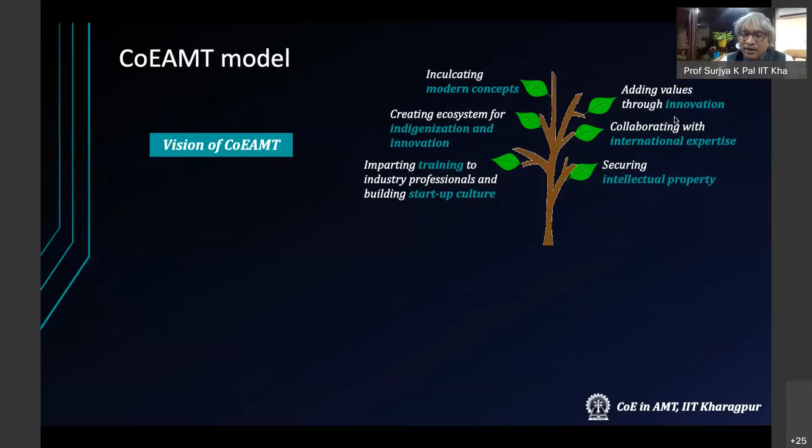The Center of Excellence in Advanced Manufacturing Technology at IIT Kharagpur is an interdisciplinary, industry-focused R&D center. We established this center in early 2018, working closely with industries, both public sector and private sectors. We are following the footprints of Warwick Manufacturing Group in the UK, working on modern concepts to bring innovations in the field of manufacturing.

At the same time, we'd like to create an ecosystem between large industries, small industries, academic institutes, and research units. We are very much open to working with international expertise as well. While executing projects for big industries, we are also giving training to industry professionals in manufacturing. We get problem statements from OEMs, working closely with OEM engineers and researchers to give solutions. We are also nurturing MSMEs so they can learn modern concepts and join the supply chain for big industries.

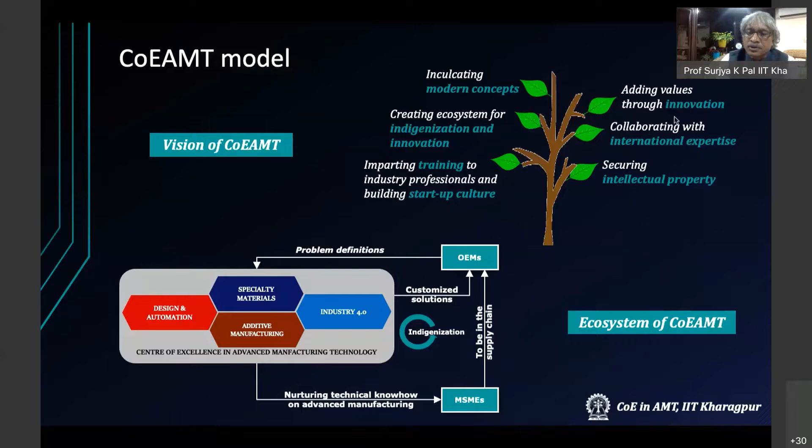While executing projects for big industries, we are filing patents, meaning the intellectual property rights are jointly shared. We have a large number of equipment and state-of-the-art facilities so we can work for industries. Our facilities are at industrial scale, so we can catapult academic innovation into manufacturing industry needs.

These are some examples of our facilities - the hybrid additive manufacturing facility, which can print metal objects close to 1 meter in length. We have scanners, and a CT scan machine is also coming up, which should be able to scan large size objects. We also have machining centers and characterization facilities.

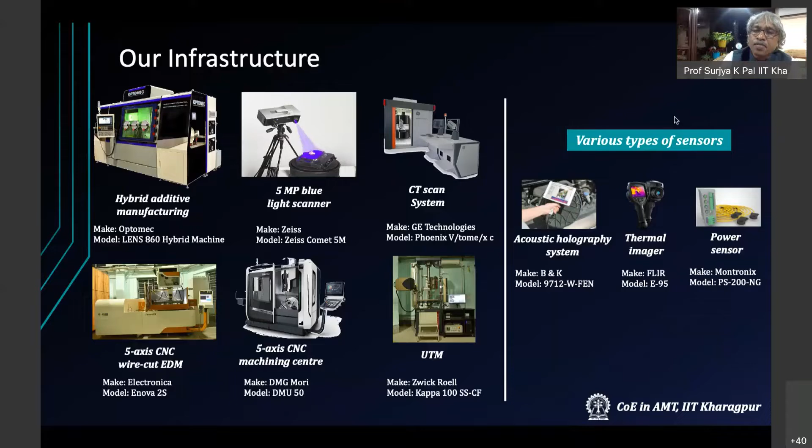We have a large number of robotic welding facilities, all sensor integrated, so we can check product quality and also check the health of the machine. We have MIG welding, TIG welding, spot welding, laser welding, friction stir welding, and also robotic structural vibration facility.

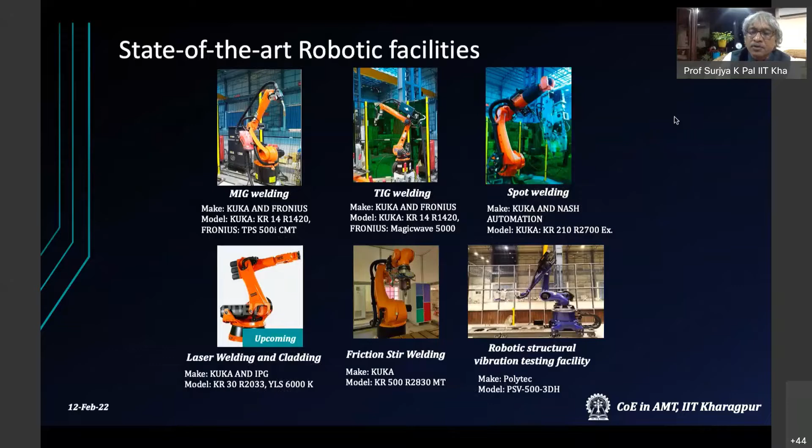All our infrastructure is housed in a 40,000 square feet industrial site area. I'm just showing a small video of that.

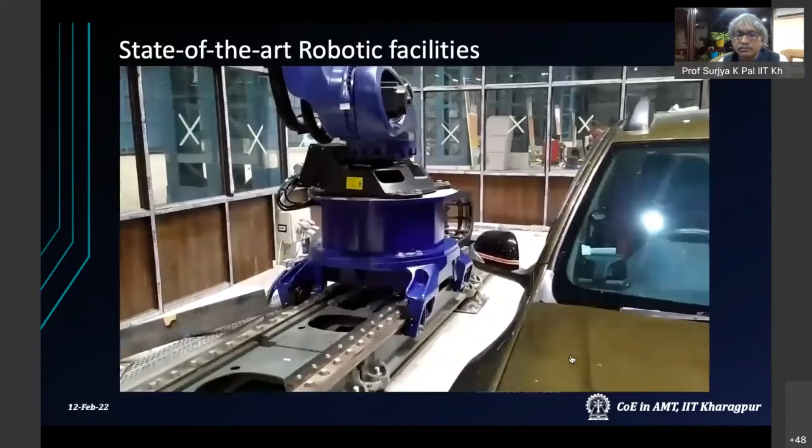We are very much eager to work with industries. On a daily basis, we are interacting with various types of industries so they can come forward and we can also work for them. With this small introduction of the Center of Excellence, I'd like to request my colleague, Professor Anandaroop Bhattacharya, to introduce Professor Christopher Bailey and take the proceedings.

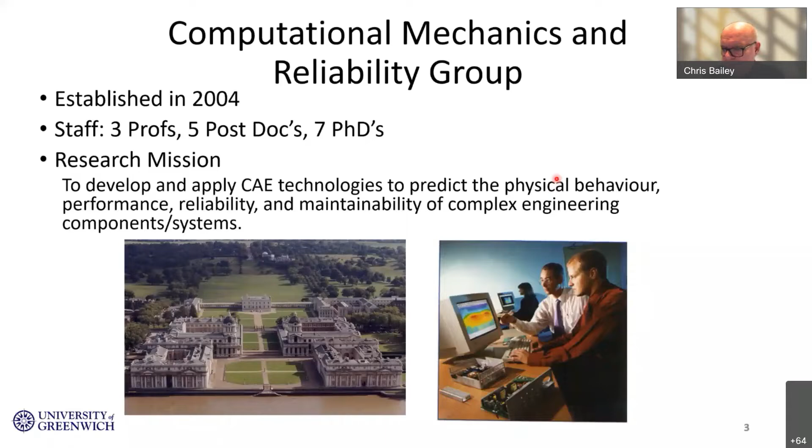So the contents of my talk today, as per the title, is very much around advanced packaging. What do we mean by that? And also the very exciting field of additive manufacturing, and how is that adding value today to electronics packaging? And then I would like to make some conclusions.

You may have heard of Moore's Law last week. Traditionally, since the 1960s, what has driven the electronics industry has been Moore's Law, based on transistor scaling. Moore's Law states that the number of transistors on a piece of silicon would double every 18 months. And that has held true since the 1960s until recently, because Moore's Law was also about the economics of this scaling, and today the actual economics changed nearly 10 years ago, and it started to become much more expensive to continue Moore's Law.

If we think about where Moore's Law has gotten us today, down at 5 nanometer dimensions, the transistor scaling we have achieved has just been incredible, how it's developed and progressed consistently over many years. But today, the sheer cost of continuing Moore's Law and what we call system on chip, where you try to build as much electronic functionality on a single die, the cost of doing this going forward has become too expensive. Hence, packaging and advanced packaging is now seen as the way forward by many companies in the industry, including the likes of TSMC, the world's largest fab facility, as well as Intel.

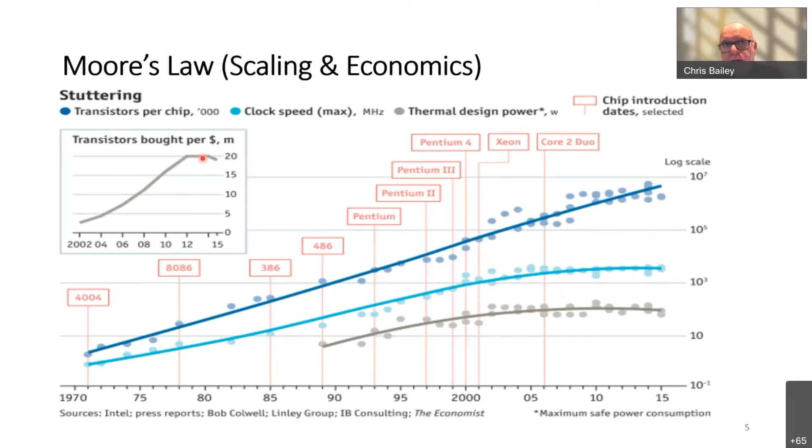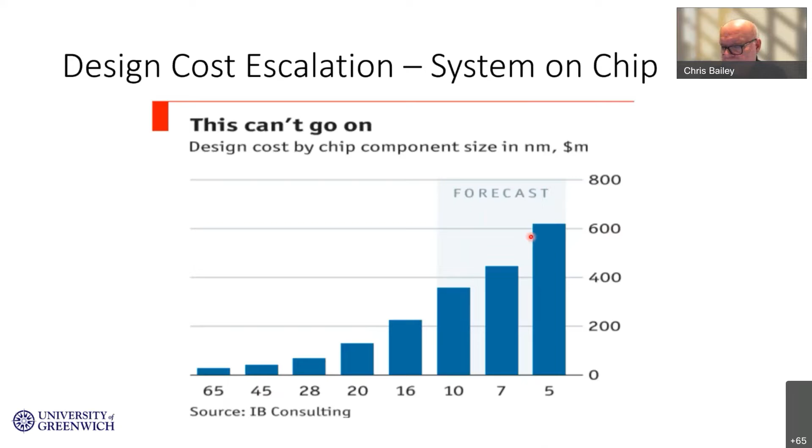Today, we hear a lot about the term chiplets. If we imagine a system on chip with a lot of different functionality, we can now start splitting this functionality, known as disaggregation. So going back to single die, but if you had logic and RF capabilities at different technology scaling, why would you do that all on the same die? You can actually start bringing these together now in a package.

This is known as system in package, as compared to system on chip. So this is the chiplet evolution, and how we package different chiplets from different technology nodes together is the whole concept of system in package, and also heterogeneous integration, where we may wish to pull MEMS components with optical die all in the same package as well as silicon.

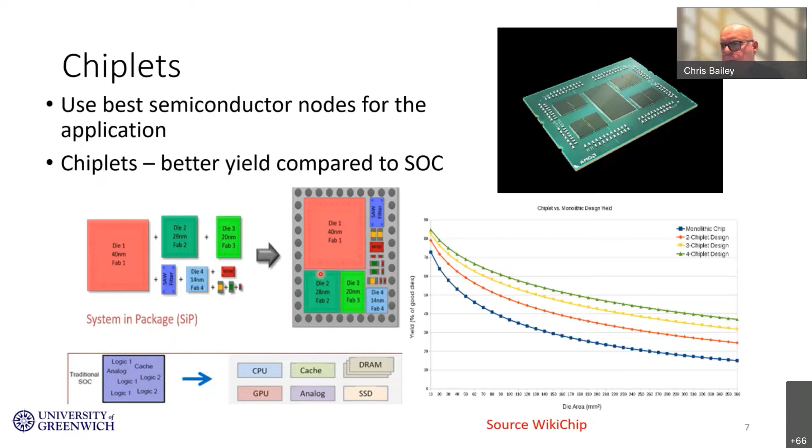So I mentioned that term heterogeneous integration, and as Professor Bhattacharya mentioned in the introduction, this roadmap, the heterogeneous integration roadmap. I will talk a bit more about that shortly, but what do we mean by heterogeneous integration? It is the integration of different technology nodes, 28 nanometers, 7 nanometers, 40 nanometers.

We use the technology that is best for the die that we're producing. And that could be MEMS, silicon photonics, power ICs, logic, RF, etc. It is miniaturized in the package by advanced packaging technologies. It's performance optimized in terms of electrical behavior, signal and power integrity, as well as thermal and mechanical.

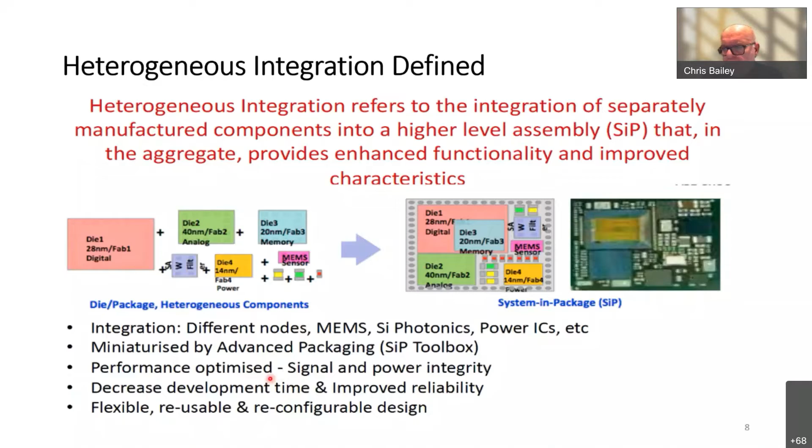So advanced packaging architectures - last week you would have heard about flip chip, BGAs and through-hole technologies. Here we're looking at wafer level packaging, fan in and fan outs. Now this is actually doing the packaging on the wafer before you split the die on the wafer. You would actually package on the wafer, and two common technologies there are fan in and fan out.

Then we have flip chip - you would have heard about that last week - and 3D IC. Now this is actually taking different die and stacking these on top of each other. This is very common today in memory, where we actually stack the die and then we use what's known as through silicon via technology to interconnect the die through each other.

Now all of these would be looking at a substrate or an interposer, where you can have the different die in the same package but connected to each other and the outside world through an interposer.

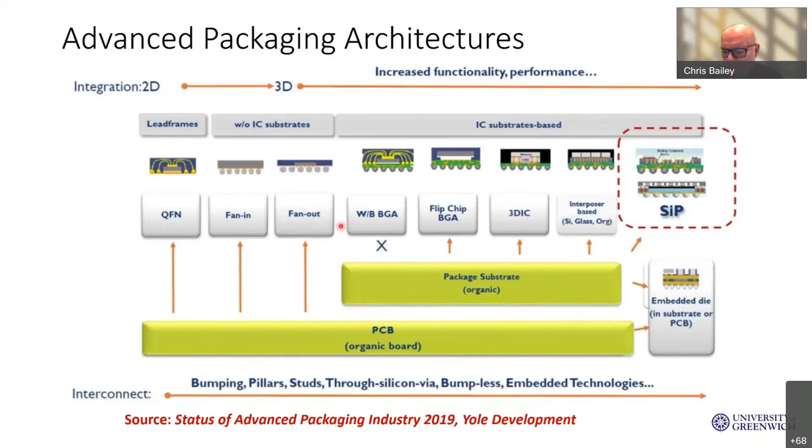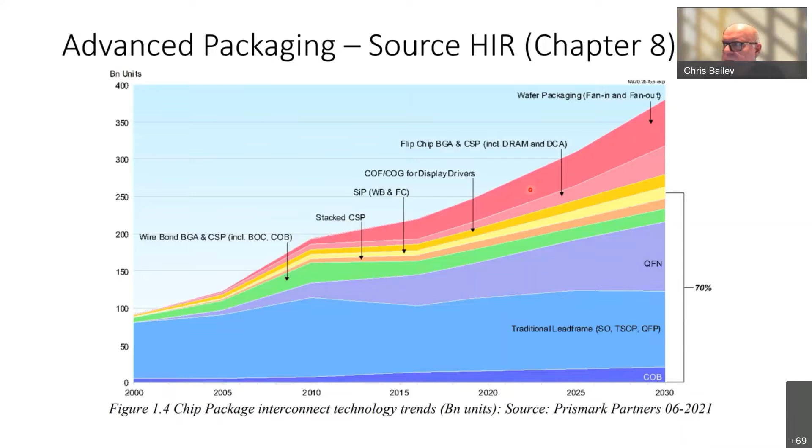If you are interested in learning more about advanced packaging and heterogeneous integration, do go to this link here on the IEEE Electronics Packaging Society webpage. There are 23 chapters in this roadmap, and each of these chapters discusses the current state of the art in different areas of heterogeneous integration and advanced packaging, and also the challenges and potential solutions to those challenges going forward. So it covers a whole number of application areas, as well as technologies and underpinning technologies for advanced packaging, such as modeling and simulation, and also co-design, which I'll talk a little bit more about in a moment.

So coming on to the design, you would have that chart I showed above about the sheer cost of design for packaging, but taking a high level view of design today, essentially we have chip design, and it doesn't integrate that well with package design and then the overall board design, the whole printed circuit board, or the system as we may wish to call that. And generally there'll be different design tools used in each of these.

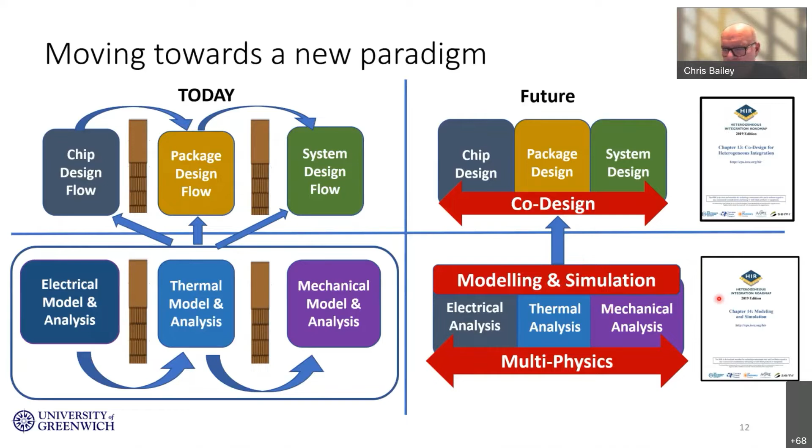The whole area of multi-physics for advanced packaging is really understanding the interactions, the electrothermal interactions, the thermomechanical interactions, particularly chip package interactions, and the influence of the package design on the electrical performance of the chip is becoming quite important. So the tools that are evolving from the tool vendors are starting to address some of these challenges in the area of multi-physics and scale modeling domains.

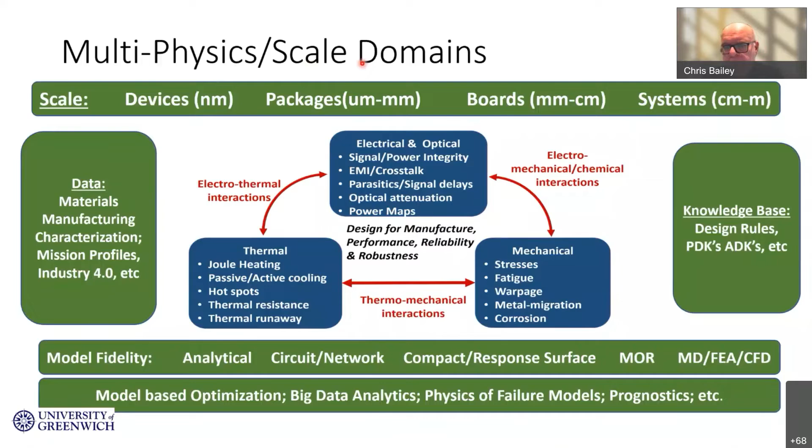Let me now move on to some examples, and this is actually a QFN package. I've picked this example because understanding the package design and behavior is important, but also understanding the influence of the assembly process - what materials are we using on the board when we assemble a package on the board. And this is the area of conformal coatings.

Now, conformal coatings are placed on a printed circuit board with the packages, and it's there to protect against contamination, moisture, and corrosion, and also a mitigation against a phenomena known as tin whiskers. Over the last 15 years, the industry has moved away from tin lead solder and solder finishes towards high tin content. This is under environmental legislation where we've had to remove lead from the solder materials and go towards high tin materials. But that can evolve into this phenomenon known as tin whiskers, which is a failure mechanism that we need to avoid.

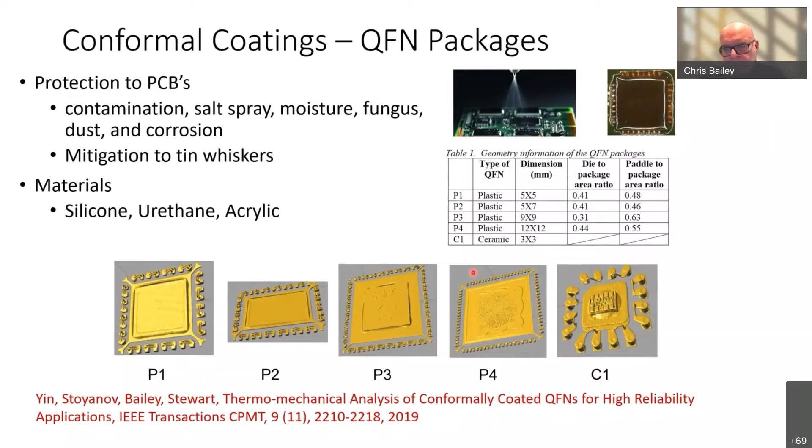And in doing that, the industry would use something called conformal coatings. But when we use conformal coatings, how does it interact with the package? This is a project we did at Greenwich with a number of companies, looking at different package types. And when we're looking at these packages, it's very important to understand the architecture of the package, using characterization technologies like CT tomography to really understand what the makeup and the architecture of a package is.

And then we would use finite element type techniques to understand how this package and the conformal coatings on a board would interact. In the industry, in understanding how a package would behave when you switch the package on - i.e. the electronic product's been switched on, when it switches off - we assess that behavior and the impact of that behavior on reliability, thermomechanical reliability, through thermal cycling testing. Here you can see different conformal coatings that will have different material properties, and we would use finite element models to understand how this domain behaves thermomechanically and the impact of that on subsequent reliability.

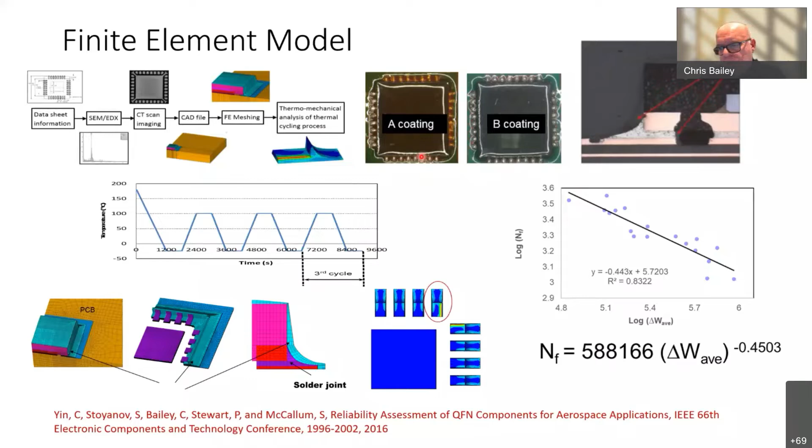And here's some results where we've investigated different coatings, and no coating, on different package types. What was very important here is the material properties and the glass transition temperature of some of these conformal coatings. Because what we have here with the package and the printed circuit board is what we call a CTE mismatch, a coefficient of thermal expansion mismatch between the materials. Understanding the influence of that mismatch and the properties of the coatings surrounding the package is very important. Now, you could do lots of testing in this type of domain, but accurate simulation and modeling tools really does provide an insight as to how the conformal coatings would interact with the package.

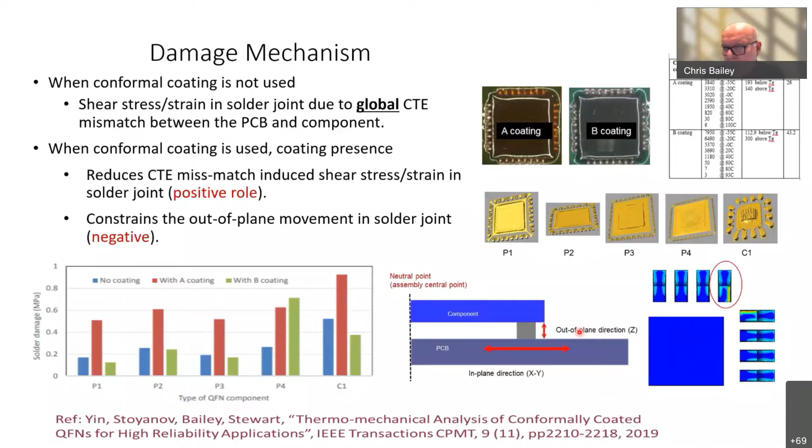So my message there is that understanding how packages are assembled to printed circuit boards, and the materials that you're using, is very important in terms of reliability. This example here is where we are stacking two dies, and this is for a focal plane array

using indium solder bumps. These are a lot of interconnects, 1280 by 1024, very fine pitch assembly. So here we were looking at a bonding technology known as thermocompression bonding, where we are actually taking what's known as the silicon readout IC and bonding it to this compound semiconductor, which will have a pixel array on there. This is a very fine pitch flip chip type interconnect, but flip chip in one die onto another die.

So it's a stacked die system, which is an advanced package. And here we were looking at and investigating, for our industrial partners, what would be the influence if we did reflow soldering for this, or thermocompression bonding, in terms of the quality of the joints and also warpage in the package assembly.

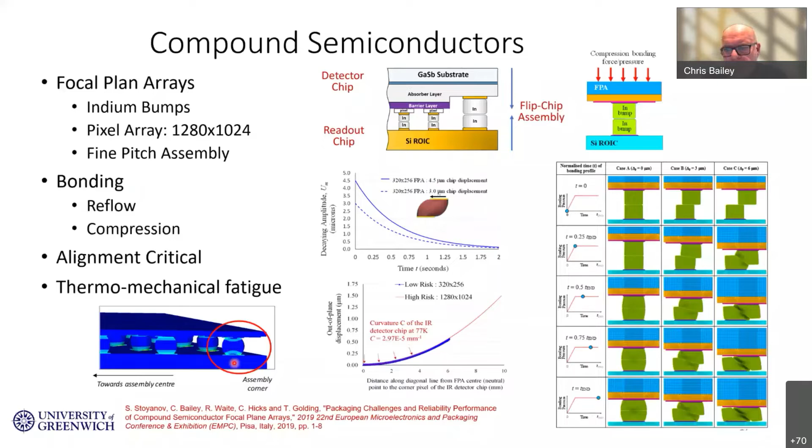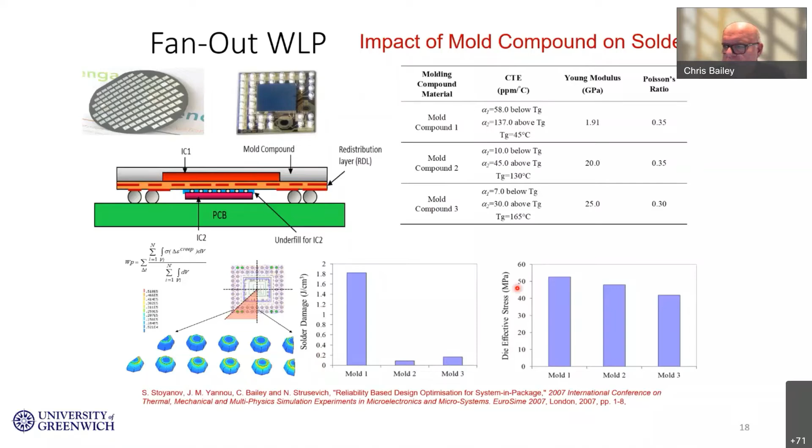And this example here shows how important the properties of the mold compound are in terms of the thermomechanical behavior of this die assembly. You can see here, depending on the molding compound used, we have different levels of solder damage and also different levels of stress in the die.

Another challenge for advanced packaging is the very small interconnects that we have, and the high current densities that could be imposed on those interconnects. So a phenomenon known as metal migration, or electromigration, but it's not just electromigration, it's also thermal and mechanical. So it is a highly multi-physics problem, and you need multi-physics simulation type tools to understand the influence of electromigration plus thermal migration plus stress migration on these types of interconnects.

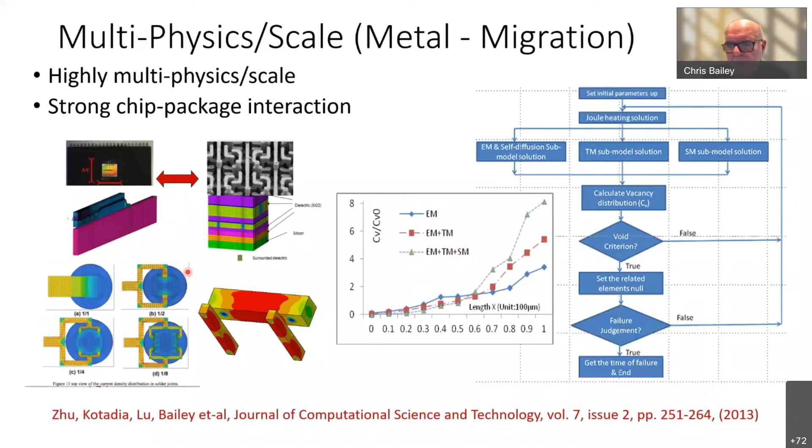Today we hear tremendous amounts of interest in machine learning. In advanced packaging and electronics packaging in general, we are gathering huge amounts of data from our manufacturing processes and our qualification processes. How can we use that data effectively using machine learning algorithms? What can we learn from that data? So we are seeing a lot of interest today in using machine learning and AI in understanding our products.

And in this example here, we were using machine learning to understand how similar one particular package would be to another in terms of its reliability.

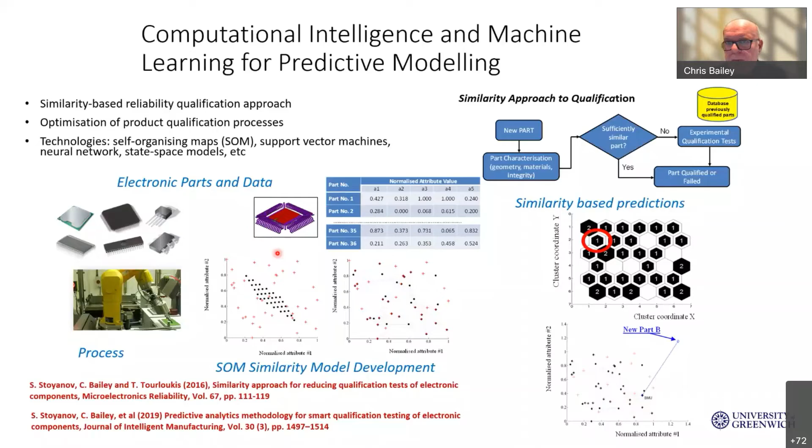Looking at the challenges for advanced packaging, in terms of the design tools, co-design is very important. Chip, package, and board system integration of the design flows. Also multi-physics, those interactions between electrical, thermal, and mechanical, and also sharing models through the supply chain. And how do we do that without divulging intellectual property? It is becoming quite important.

Metrology and modeling, I've given some examples above on that, very important. Machine learning, and with advanced packaging and heterogeneous integration, we are looking at different package architectures, the system in package I mentioned before, but also new materials, new interconnect structures. What are their failure modes and what are their failure mechanisms?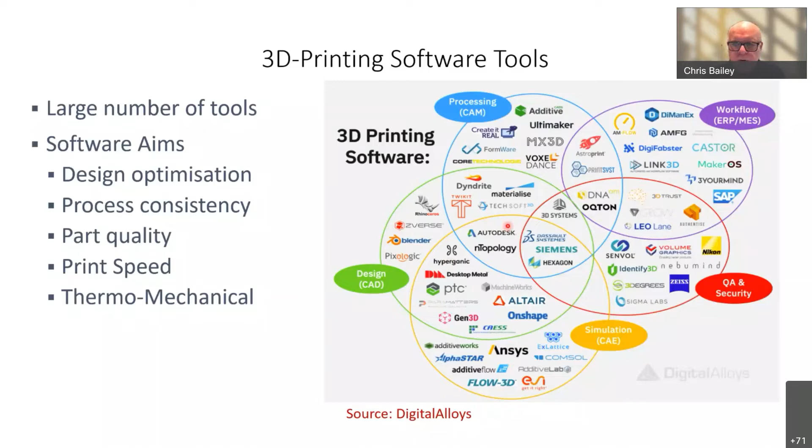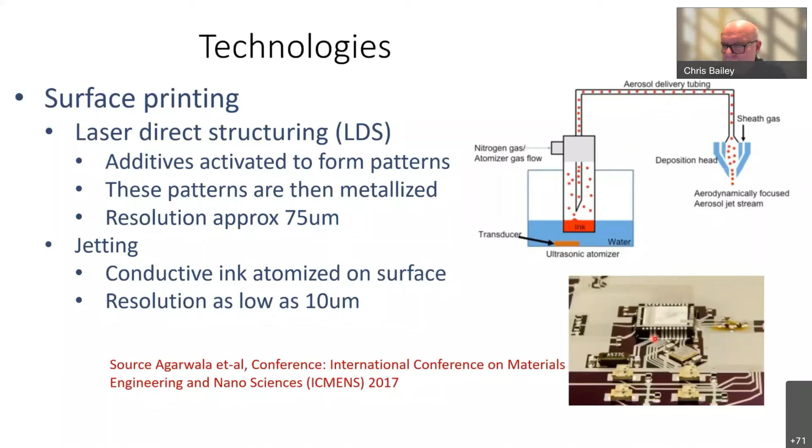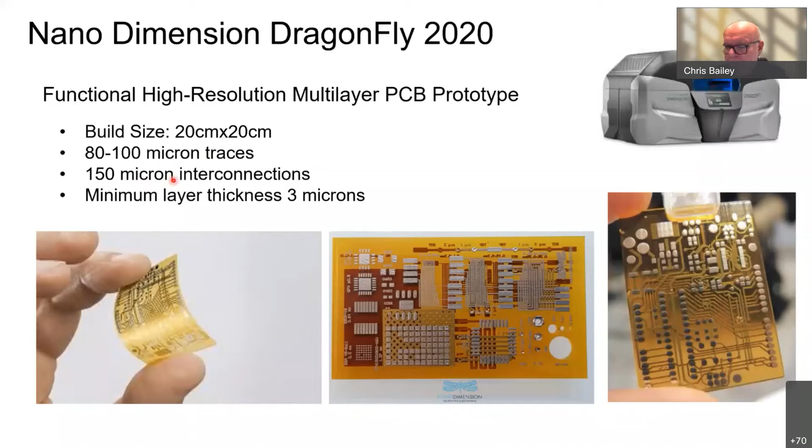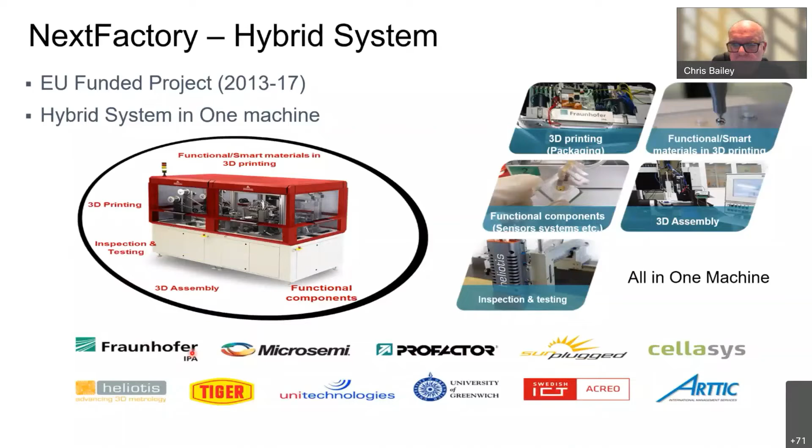That's a commercial printer. This is a European project I participated in a couple of years ago, looking at bringing together 3D printing and 3D assembly. We were working with a robotics group at the IPA Fraunhofer Institute on the NextFactory process. This was a plug-and-play system with printing units, curing or sintering of the materials, assembly of the components, and inspection. Boards would go back and forth as the 3D printing process took place.

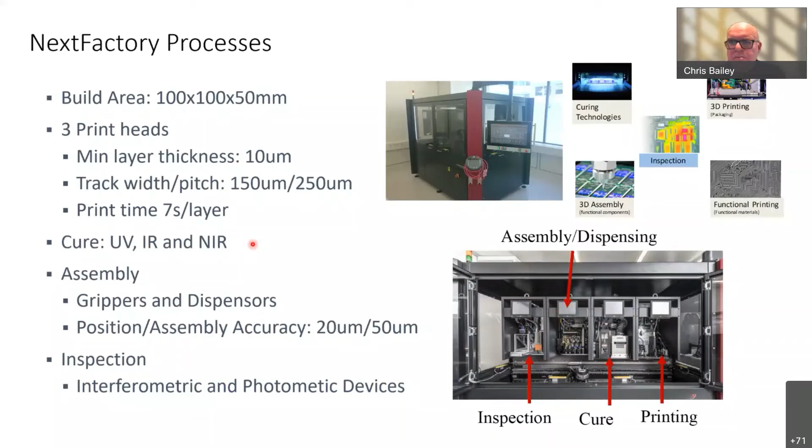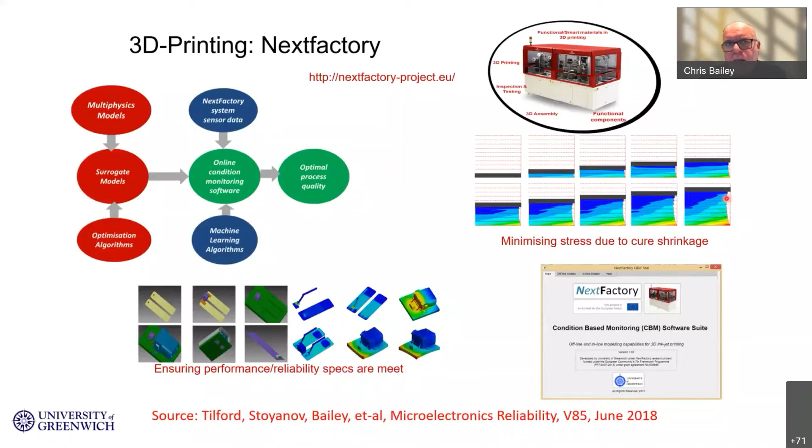Modeling and simulation for additive manufacturing in electronics packaging. One key thing is as you build layer by layer, you will get thermal stresses, and understanding those is very important.

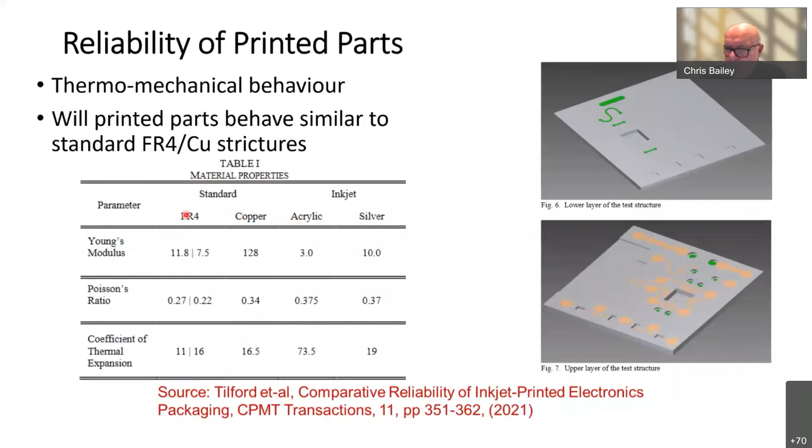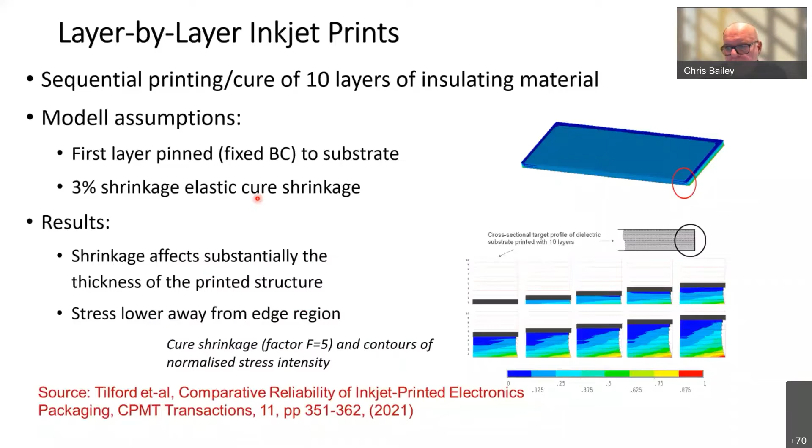This is an example comparing a standard circuit board to an inkjet printed circuit board using silver as the conductive material instead of copper, and acrylic instead of FR4. We were looking at predicting this thermomechanical behavior as you build up the layers, which involves cure shrinkage as well as CTE behavior. The models we built helped us understand the difference between standard materials and inkjet printed materials. The stresses were pretty much the same, but the deformation in the inkjet printed materials was much higher than in standard materials.

So here we're looking at design tools and modeling to help understand and optimize the 3D printing process for printing circuit boards and package components.

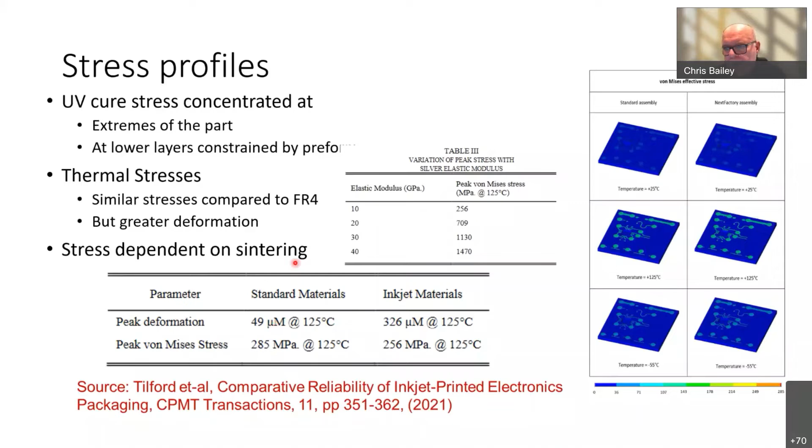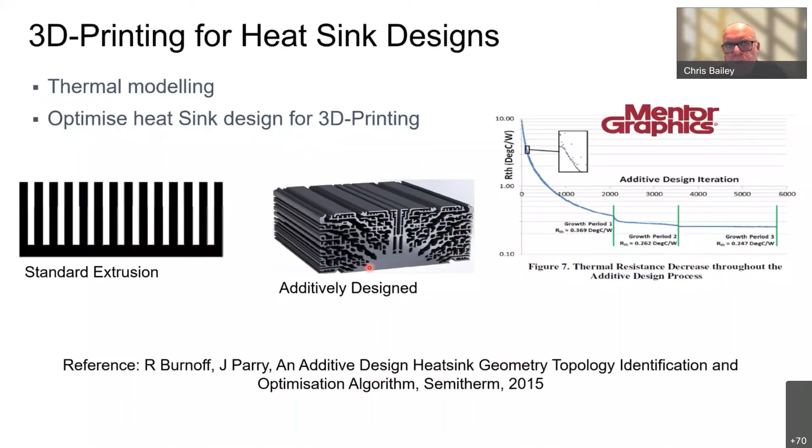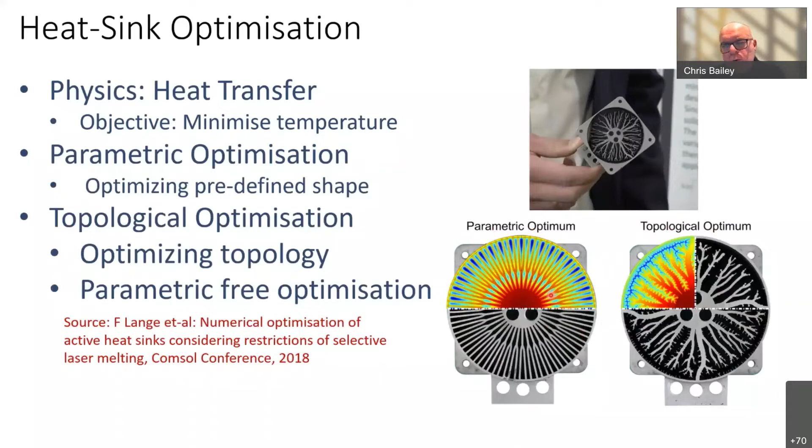Here is another example of heat sink optimization using modeling and simulation technologies, parametric optimization and topological optimization, where the goal for a heat sink is to remove as much heat from the die and package as possible. Using modeling with the objective of additive manufacturing, you can design very interesting structures that will maximize heat removal from our systems.

So the challenges for additive manufacturing: there's a lot of research taking place today in electronics packaging, but the challenges are the materials, the fabrication speed, the dimensions and tolerances, and also the evolving design tools.

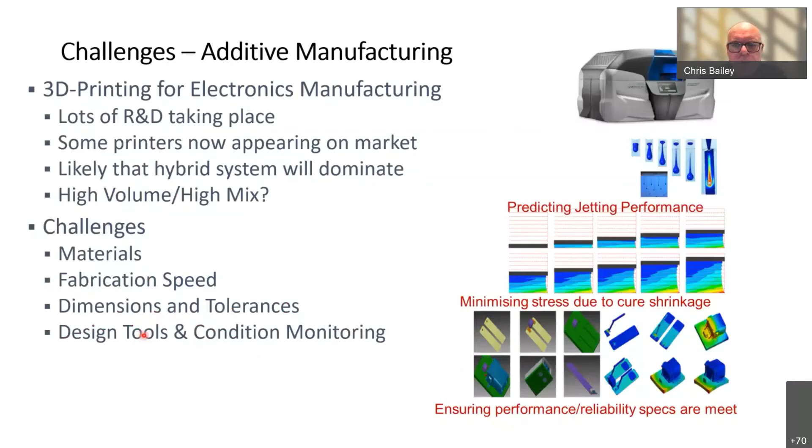I'd like to now conclude my presentation. I talked about Moore's law and the cost of continuing Moore's law for system-on-chip technologies. The economics of Moore's law does not work anymore - that is well understood. Future scaling that we have seen with Moore's law is going to be through heterogeneous integration, and there is a term used in the community called 'more than Moore.' Through heterogeneous integration and advanced packaging, we could probably do better than Moore's law going forward.

With chiplets and advanced packaging technologies, there are some very exciting opportunities ahead. Additive manufacturing is now being used, and there's a lot of interest in this area of electronics packaging. I focused this talk around some of the co-design and multi-physics modeling challenges - very important technologies, because understanding reliability, electrical and thermal behavior of our electronic parts, products, and packages at the early concept stage is very important. Identifying an error or design flaw early can save significant costs later, because the costs of not capturing a design flaw early dramatically increase over time. I also talked about the heterogeneous integration roadmap.

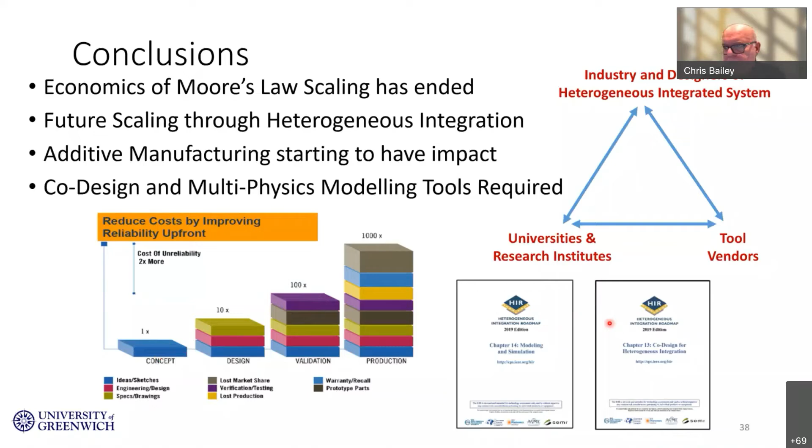Finally, I'd like to talk about a collaboration I am delighted to be starting with the Indian Institute of Technology at Kharagpur, and also Jadavpur University in Kolkata. Professor Bhattacharya did mention this course, Fundamentals of Electronics Packaging, but we're going to work on it more and bring in some advanced packaging technologies, and talk to industry to see how this course would be useful for industry participation. This is funded by the British Council.